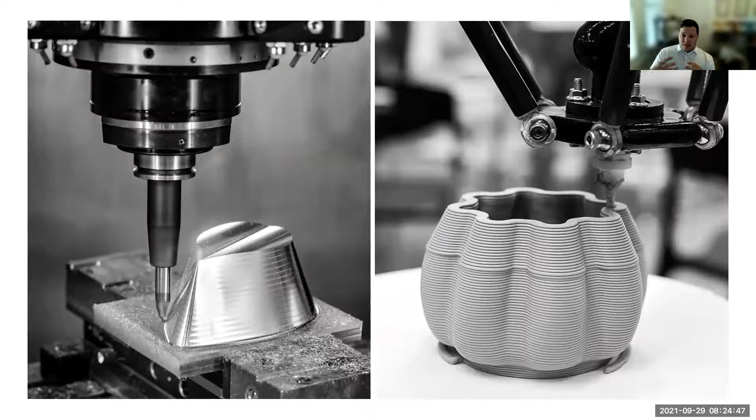As we begin to see fabrication technology advance, we're starting to see additive manufacturing with robotics, 3D printing, as well as subtractive fabrication processes. We're starting to see this need to make all sorts of different types of tools - that includes the physical making of the hardware, so either hacking, modifying, or building from scratch your own hardware to develop certain new workflows, as well as the digital side. How do we actually make our own tools to either automate our approach and make it faster or better, or develop new workflows that haven't really existed yet?

That's really where I've focused a lot of my time and my own research. One of the projects I wanted to start with today was a project I started what seems like a million years ago, but probably back in 2009-ish, maybe even earlier, with colleague Jason Kelly Johnson out in San Francisco.

We started a project called Firefly. One of the key concepts for us, or for me at least, was this melding or merging between hardware and software.

We can take the idea of things that sense the world around us, whether those are analog or digital sensors, game controllers, webcams, mobile devices - all these objects around us that have the ability to sense or perceive the world. We can call those inputs, and then we can define, usually through code of some sort, a behavior of what we want to use those inputs to define some sort of output, some sort of reaction. We want to control motors, valves, an LCD screen, or anything you can think of. That's your traditional feedback loop.

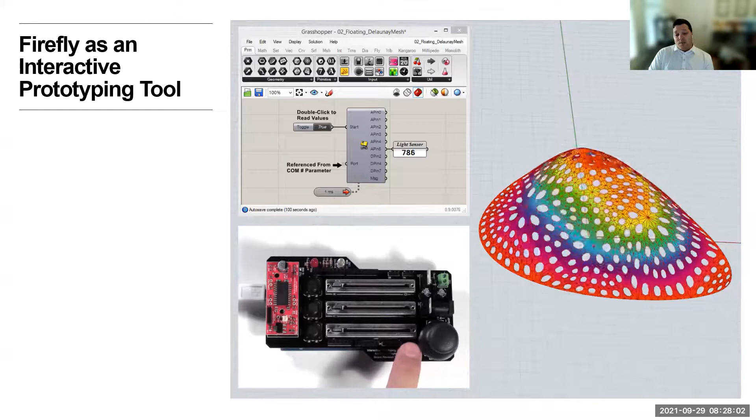That became a pretty powerful and interesting idea to work through. Really, what Firefly is, is this ability to take inputs - in this case you're seeing a light sensor, but it could be any number of inputs - and use those to, in real time, control a digital geometry.

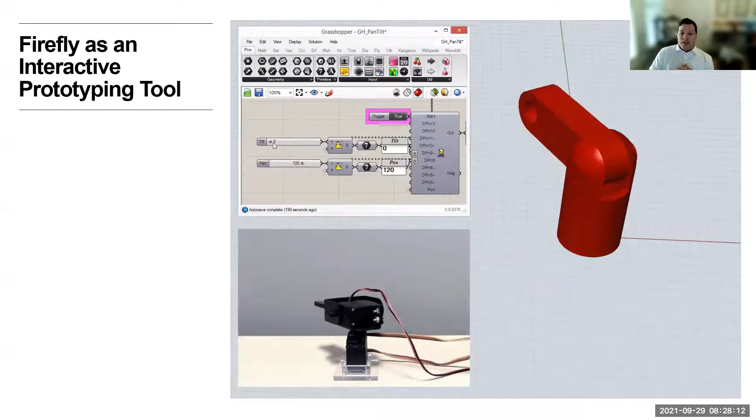There have been other tools in the past for processing and any number of tasks, but one of the things I think is beneficial about being coupled within a 3D environment like Rhino and Grasshopper is that you have the ability to drive 3D models really quickly, prototype them really quickly. You also have the ability to send that information back out and control physical devices like motors, a pan tilt servo, or we can do simulations.

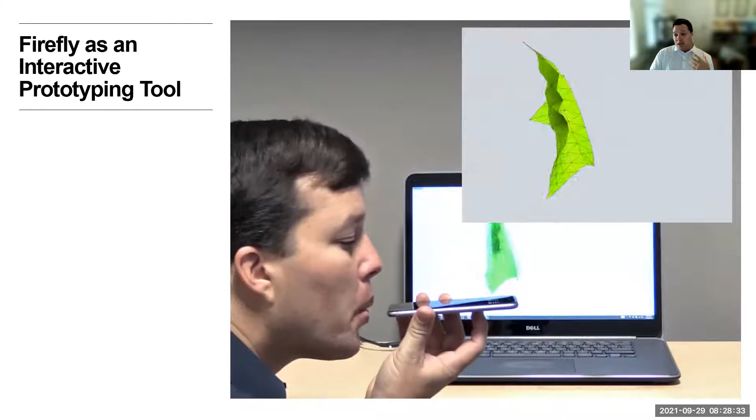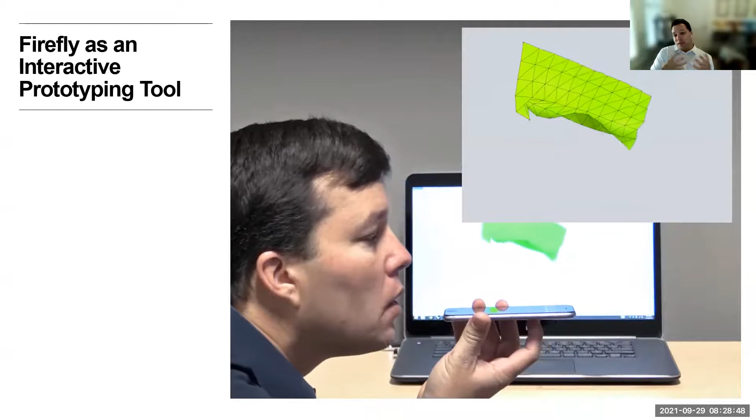We can take inputs like the microphone on your phone, and as I blow into it, it's basically sending a wireless signal to the computer and simulating a wind vector to move this flag of some sort.

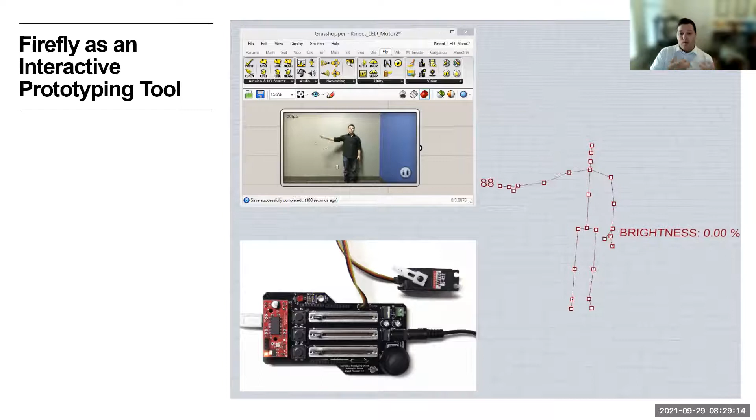Or using computer vision in a way where we can use our bodies to begin to control the world around us. Here are very simple, basic examples where we're using movement, in this case using the Kinect, the earliest version of the Kinect, to track our body, and then based on the positioning of our body, create a behavior, whether we want to control a motor or turn on a light.

One of the things I find really compelling, as I've mentioned about Firefly, is it sort of augments not only this feedback loop, but it also begins to introduce a different way of working for users, which I talked about a little bit. It takes this idea of the way most people are comfortable working with, say, sensors and motors.

In particular, there's been a real movement over the last decade using something called an Arduino, which is a programmable microcontroller. But really, a lot of times the way you program that is through code, through writing a text-based program, which gets compiled and then uploaded onto the board.

And that's the behavior that you're using. You're basically saying, go read some information from this sensor and use it for some sort of output. But you're doing that by writing code.

A lot of times, what I've found in various workshops and teaching opportunities is that for certain people, they don't really gravitate towards that mode of working, writing text-based software development. They have tended to work better in some instances with a visual representation, maybe a spatial representation, where I'm sure you're familiar with Rhino and Grasshopper, but particularly Grasshopper's visual programming environment seems to have opened up a lot of opportunities for people who gravitate towards a more visual programming environment.

But we also have this ability, I think, which became kind of interesting. One of the research parts I was looking at was how could we reverse that flow? How could we actually take something that was a visual graph and convert it back into code that could be uploaded back onto your board, onto the Arduino board?

So like I said, most of the time, the way we program these microcontrollers, for those who haven't seen it, it's not going to pick up because of the blur, but anyway, Arduino is a simple little microcontroller, but you typically have to compile it into machine language that it can understand. And typically, like I said, you need a compiler that takes some sort of text-based code. It can't really translate a Grasshopper graph for you.

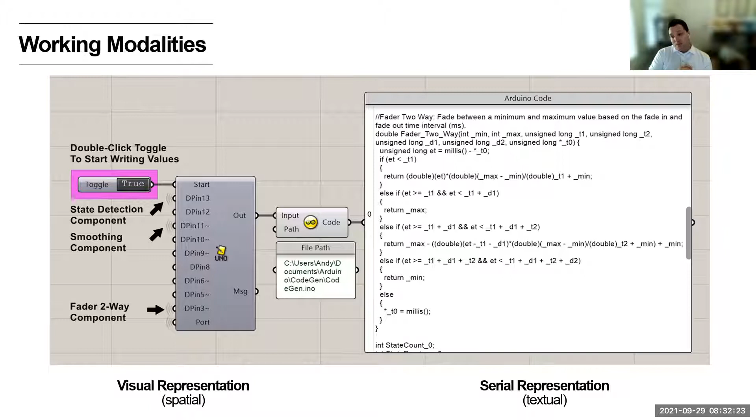So one of the things I worked on was a code generator, which in this case will look upstream on your Grasshopper graph and detect any type of component that it sees and try to write the appropriate Arduino code for you. So it really does become this prototyping method where you can use parameters, sliders, dial everything in for your prototype, get it working the way you want.

But typically the way you would have to then do is take that and write the appropriate Arduino code to get the device to work the way you want it. Now you can skip that step. Essentially the code will be written as you're prototyping, and then you can upload it to the board and let it run autonomously without having it connected to the computer or Grasshopper or anything else.

So it also, as a teaching tool, lets people look under the hood a little bit. For example, if you didn't really know, Grasshopper has a certain number of components, like a remap component or a constrain component. If you didn't really know what's going on under the hood, you just pass in some information and it spits out some information, but you don't really know what's happening. Now you can actually go in and look at the function for these components.

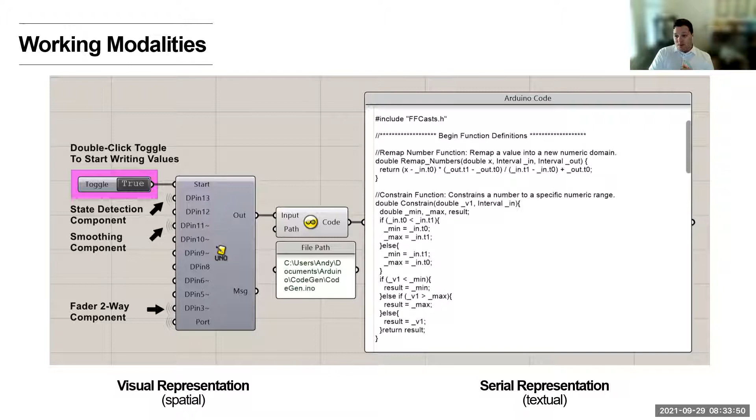So another thing is that this methodology sort of begins to open up new opportunities from a pedagogical standpoint, which I find kind of compelling. But you're probably asking yourself, after looking at those simple little examples, how do you use this? Why is this important for me? So I wanted to show a couple projects that I've done, where I used this type of workflow as a way to create hopefully something new.

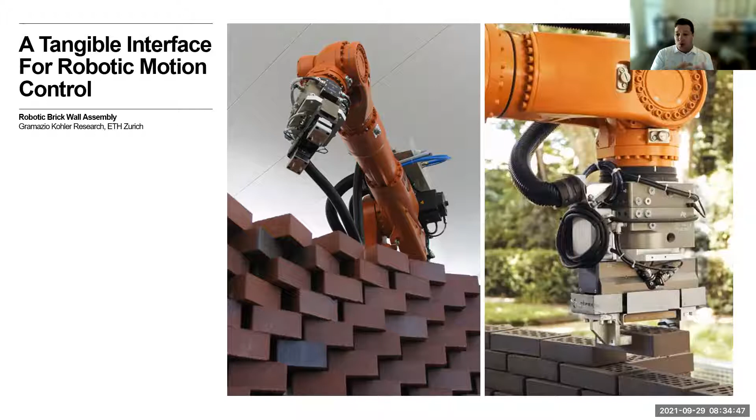But one of the limitations you see in a lot of instances is that it requires a large learning curve about not only knowing how the robot works, how to run the simulation, but how to write the program itself to upload to the robot to execute its path plan. So there's a lot of information that is typically unavailable for a standard designer. Oftentimes what happens is a designer will work on a project, a design, and have to hand that off to somebody with greater expertise in that domain in order to create these programs and simulations. And if at some point a collision detection or some sort of singularity is detected, it has to send back to the designer, who has to then change the design. It's a kind of slow and cumbersome process.

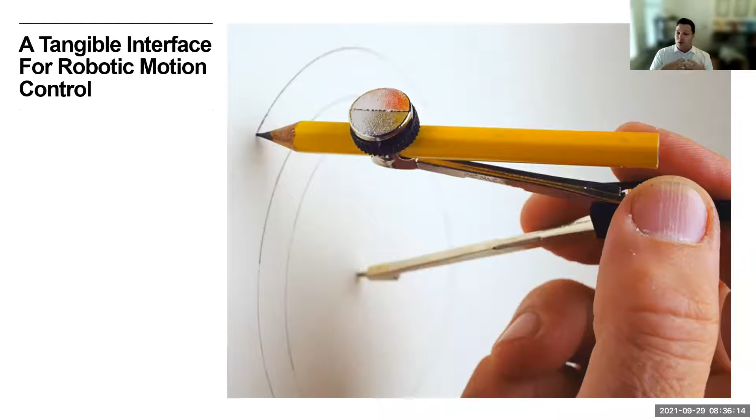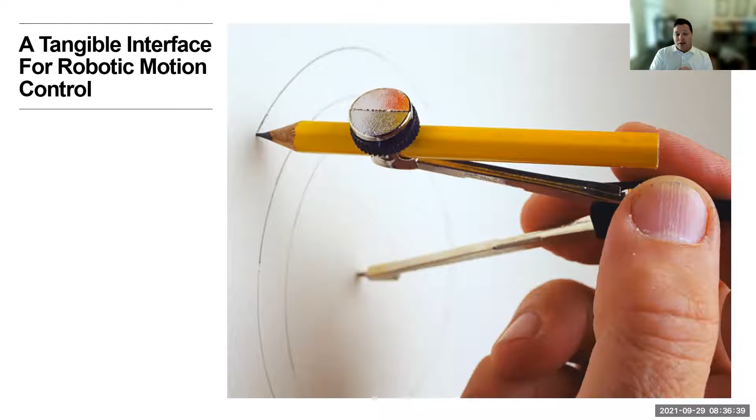So for me, I wanted to create a more intuitive workflow for a designer coming to robotic fabrication. Meaning, how could we create a tool, something that designers are already maybe used to? Something like a drawing tool. As designers, a lot of us are used to using tools, compasses, French curves, you name it, any number of tools to help us augment our design process. So how could we create a tool that could intuitively allow a designer the ability to control a robot during the fabrication process?

I started with, in this case, the ABB IRB 140 robot that we had at the GSD at the time. By extracting its core joint and axis configuration, I was then able to design a controller that mimicked those same configurations. In this case, it was at a half scale.

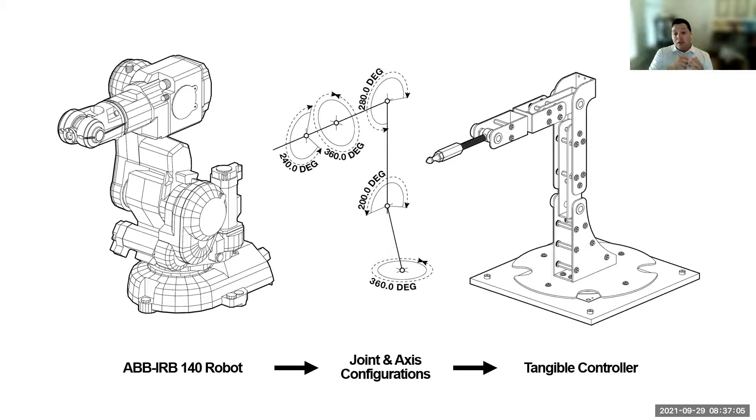At each point, I was able to essentially use a sensor, in this case a high precision potentiometer, which measures rotation. So if I use a sensor at each one of these axes, or at least pivot points, I can determine how much each of these joints have moved. And using a sort of forward kinematic simulation, I can work up the stack and find out where the end of that end effector would be. So just by having 5 sensors, I can perform a really simple calculation, a matrix transformation, and find out where the center point of that tool endpoint would be.

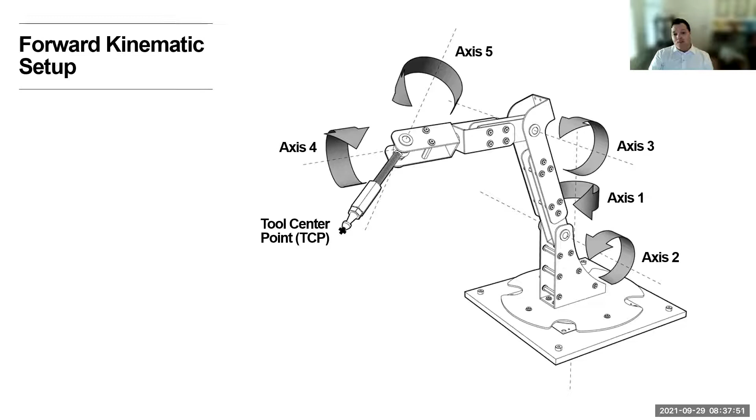So this was the actual device that I ended up building. Part of this project, this was a school project, not unlike what you guys are probably encountering. This was a project that I did while I was at the GSD and took a class at MIT called How to Make Almost Anything, which was a fantastic course. One of the requirements was that you had to fabricate and make everything in your project, including the circuit boards and writing the code and everything.

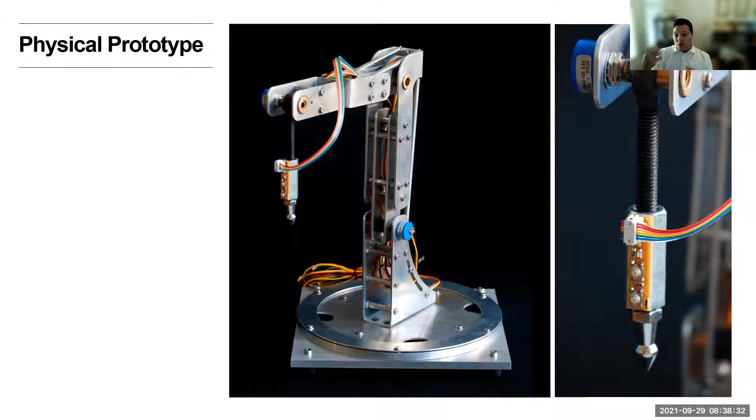So here you can see one of the circuit boards that was created on the tool tip to record or reset the tool path plan that you've created. And this was another circuit board created in order to, this is a modified Arduino board, that takes in all the inputs, figures out the rotation information, and sends it on to Grasshopper. So as a proof of concept, this was the first step in creating a real-time simulation. You can see as you're moving each of those joints, it's performing this transformation in real time and moving the three-dimensional geometry in the computer at the same time.

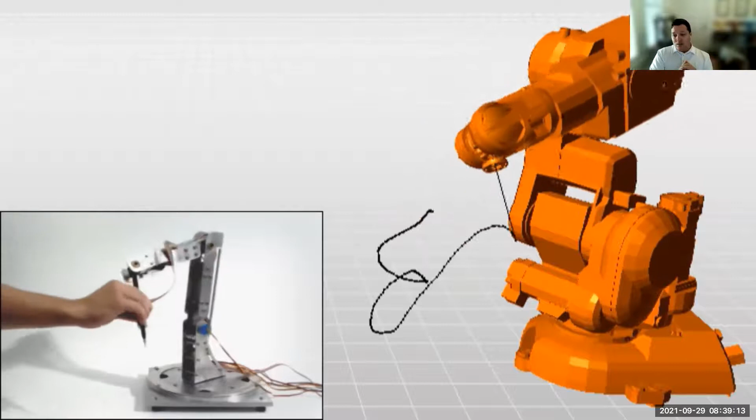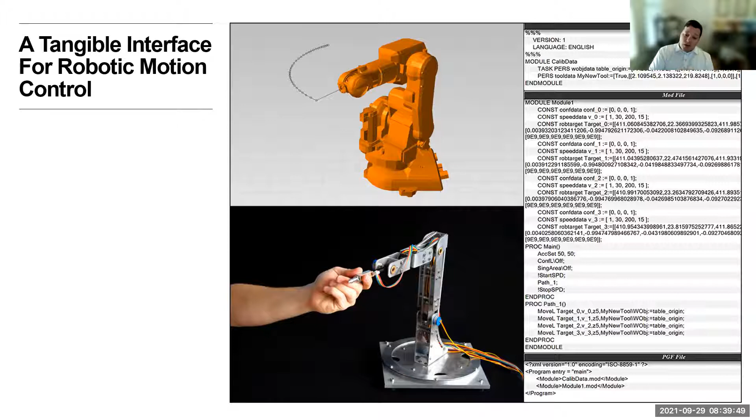Because we're moving this in a three-dimensional environment, we have the ability to track where the tool endpoint is at any given time. So as I push that button, I can simply begin recording the tool path. At the same time, I was able to translate that information into the machine language used to upload to a robot to execute the path I had just drawn. I also worked out a real-time streaming process that could send the movement information in real time to the robot. So here you're seeing the hybrid going from a physical tool to a digital simulation back out to the real world, to the real robot.

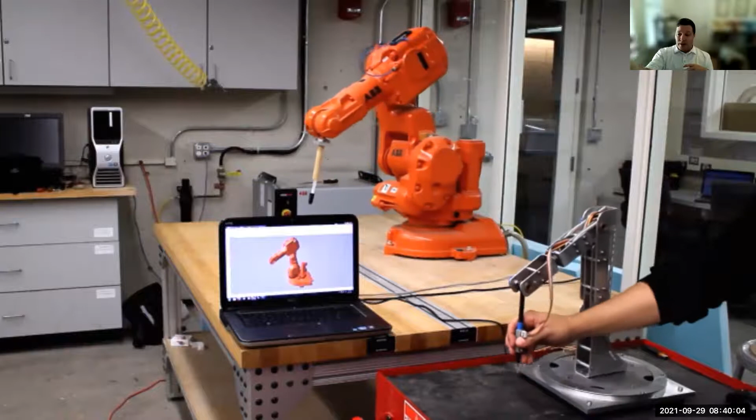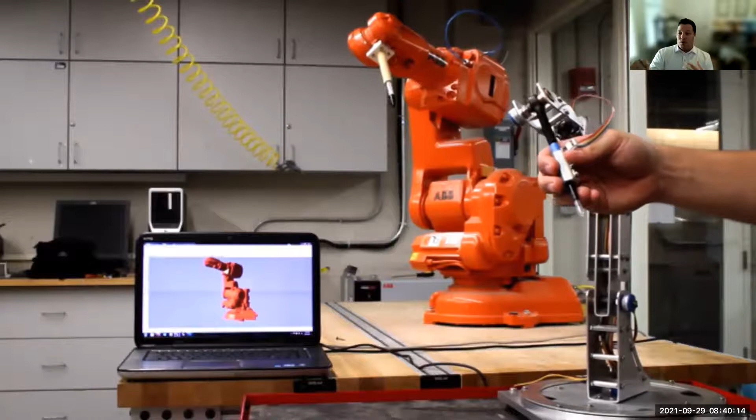This not only opens up new opportunities for a designer who can intuitively sculpt, draw, or modify things in the 3D environment, it also opens up opportunities for removing the user from the work area of the robot. Some of these robots are quite large and potentially have end effectors that could be circular saws or anything else that might be dangerous.

This also offers the opportunity to remove the user from the immediate working area and offer a factor of safety. So that's one project that begins to meld some of the concepts I was using in Firefly, this idea of making in the physical world and also making in the digital world, and combining those using sensors or actuators or any combination. For me, that's really where I find a lot of the work interesting, this ability to combine both of those worlds, because I do enjoy getting my hands dirty, making things, as I'm sure you guys do as well. But at the same time, we need to think about how we can use new tools like a robot and begin to augment them to create new opportunities.

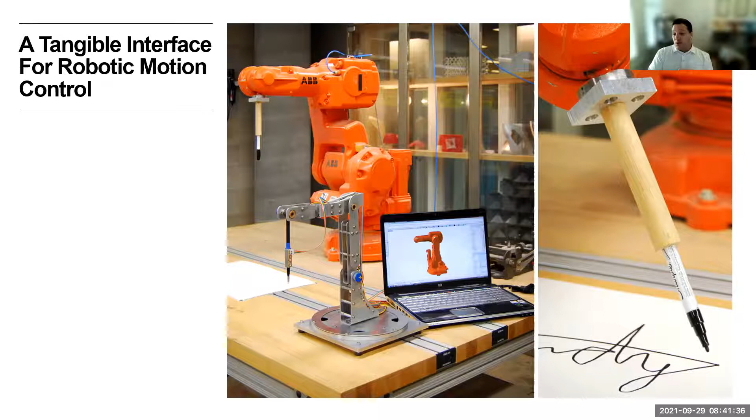I'm going to switch gears a little bit and talk about a second project, still in the same vein, but this was more about my doctoral research at Harvard. One of the things that became important for me was a simple question: what does it mean for architecture to be smart? I'm sure if I were to ask each one of you to respond to that question, you'd probably have a pretty accurate but also diverse set of answers.

Really, that's because there is no definition that meets all of the criteria. For each individual person, smart architecture, smart cities, smart environments - we hear a lot of that, but there's really no definition that has true consensus. We've seen the evolution of intelligent buildings starting in the 1980s, with systems that were separated and not really communicating to one another, all the way up to newer technology stacks today, which are fully automated, fully connected systems. That's really the evolution of what we call intelligent buildings.

But if we think about the control strategies, up until relatively recently, they've all been reliant on this idea of what I call a reactive or automated model of control. You can think of it like a thermostat: the sensor detects a rise in temperature, and it's programmed to kick on the air conditioning. It's a relatively simple reactive system. There's no way for the system to understand how the space is being used, or use any capacity for learning or reasoning.

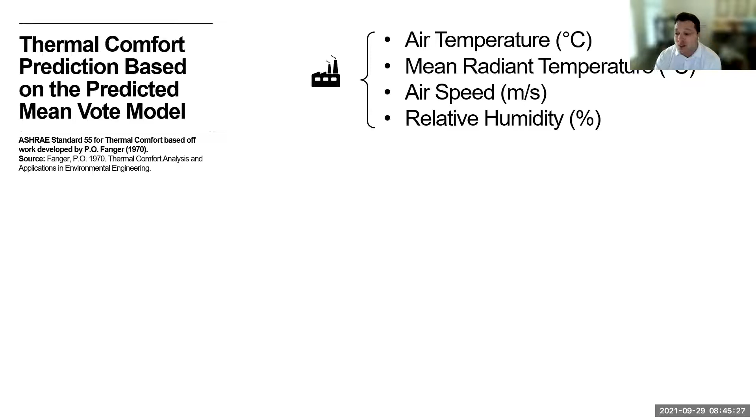There's air temperature, mean radiant temperature, air speed, and relative humidity. Those are the four environmental factors that come into play when trying to predict whether an occupant will be hot or cold. The two personal factors are how much clothing a person is wearing and the amount of work they're doing—are they digging a ditch or sitting in a chair? So what is the metabolic rate, or the amount of work they're actually doing?

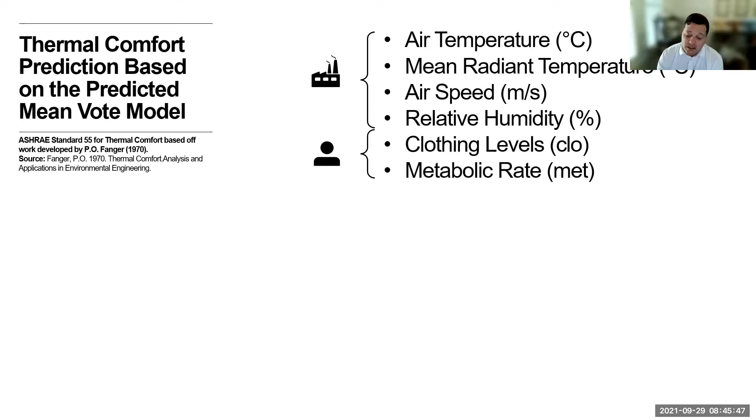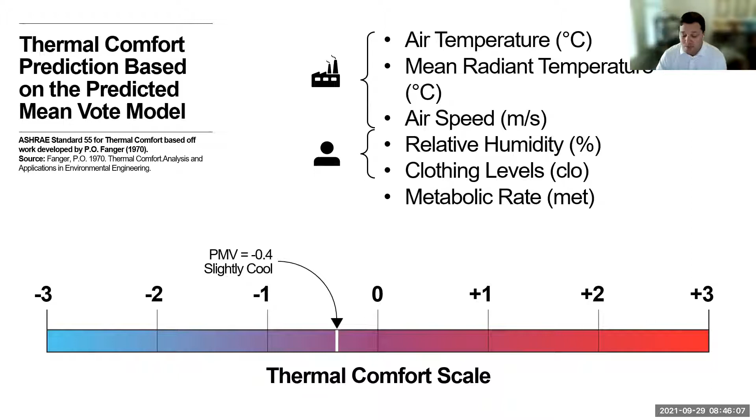Those six factors go into a large equation and essentially give you a value somewhere between -3 and +3, which predicts if the user is going to feel slightly cool or too hot, the ideal being somewhere around 0. Then, using another graph, we can predict the percentage of people who would be dissatisfied using that predicted mean vote.

the ASHRAE standard is set up to allow for basically—the standard says it's okay as long as we fall within an 80% satisfaction rate, which to me means we can do better. As architects, as engineers, we should be striving to do better than having 20% of people in our spaces being dissatisfied every day they come to work. If you think about the labor force, you're talking about millions of people who show up to work every day who are generally going to be dissatisfied with the environment around them, and to me, that's a problem.

So I developed a tool. A lot of the research I focused on was developing a neural network tool built on this idea of the predicted mean vote.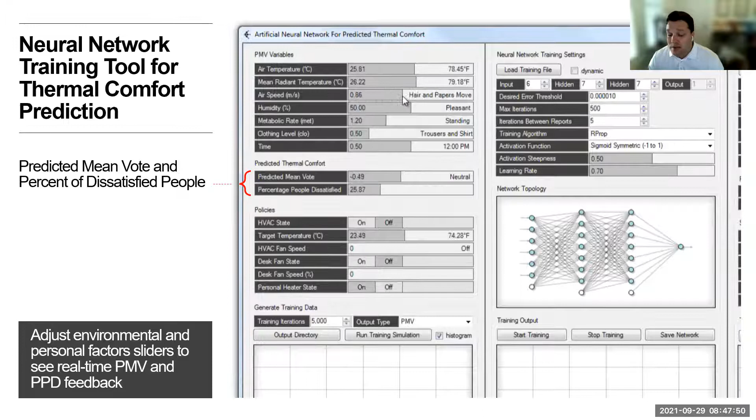As I mentioned before, there's an algorithm where you plug in those six different factors, and it will determine the predicted mean vote. So here, the left-hand side of this interface is really about using that algorithm that P.O. Fanger developed. You can see you're moving these sliders, and you can see the predicted mean vote and the percentage of people being dissatisfied.

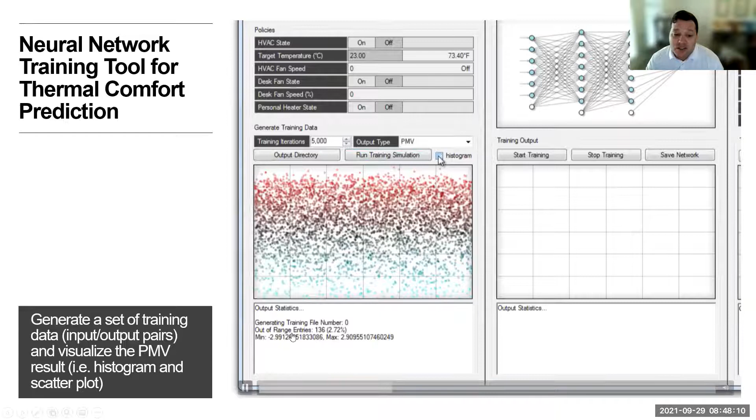Here you can generate basically random data, randomly assigning all six different values and creating 5,000 different iterations. This generates some training data to feed into the next stage, the neural network training.

So here, what we're doing is taking those 5,000 sample points, and we're going to try to create a neural network which can get as close as possible to that predicted mean vote output.

The way a neural network works—again, this is a condensed version—is you have some inputs, and it tries to predict an output. In this case, the input is those six values, and the output is going to be the predicted mean vote, this number between -3 and +3.

So you're feeding in those values, and as it learns, it's essentially adjusting the weights of the neural network so that at first the output is really far off. But ideally, as it learns, that predicted mean vote gets closer and closer to the true value.

So here you can see I'm coming up with some different settings, and I can start the training—there you can see the error rate. Essentially, at first what it predicted and what it should have gotten were pretty far off. But eventually, as it begins to learn, that prediction becomes much closer to reality.

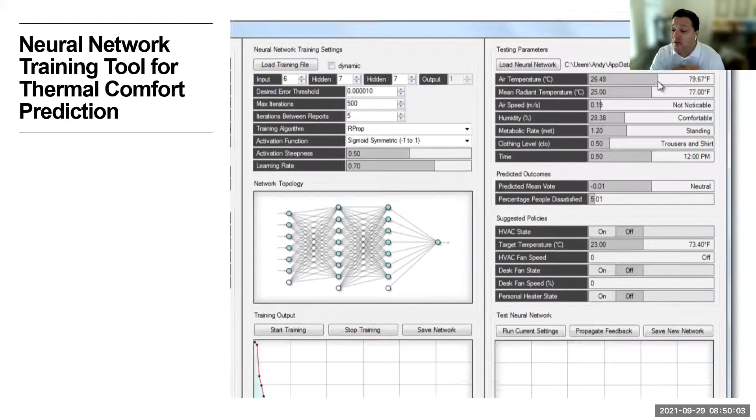So the next step is to give it new values. Now I can load in the neural network and give it different values to see what the predicted mean vote would be, but now it's using the neural network output instead of the algorithm.

So here I can take those same 5,000 samples and run them. The red in this case represents the initial values, and the blue are the outputs from the training set, from the neural network. Really, what you should see is a graph that overlays on top of each other fairly closely.

You're probably asking, why are you doing all this work? You already could predict it using the algorithm, so why are you doing all this work? Well, the key here is that neural networks have the ability to adapt over time.

So if in this case, the value thought it was at 0, but I change it to say the user actually was quite cool, they thought the setting was cool based on these different factors, I can retrain the network based on this new value.

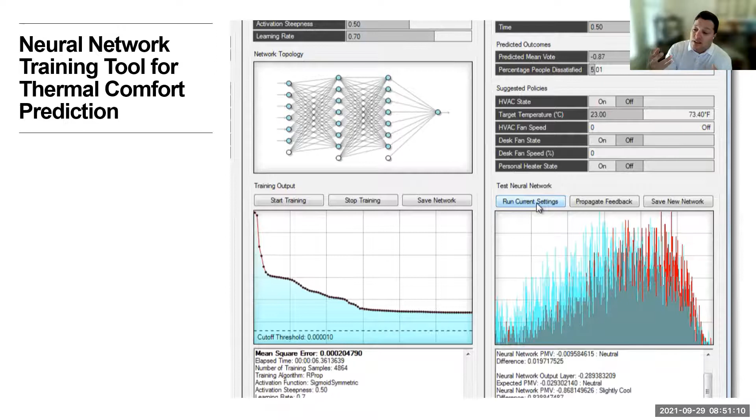And now when I run the setting, you'll see there's a shift in the neural network. So what it's done is it's learned how to augment the settings based on the feedback given from the user. So if we look at this, we have the true value starting off, which is based on the average user, if you will, based on all these different settings.

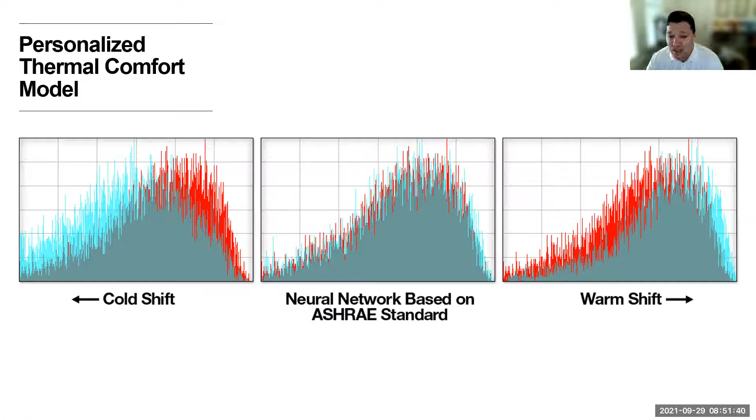But as we begin to give it feedback from the user, the neural network can begin to learn and adapt the space accordingly by either shifting to the warm side or shifting to the cool side based on the feedback it's getting. And so it has the ability to adapt to each individual user and how it's being used.

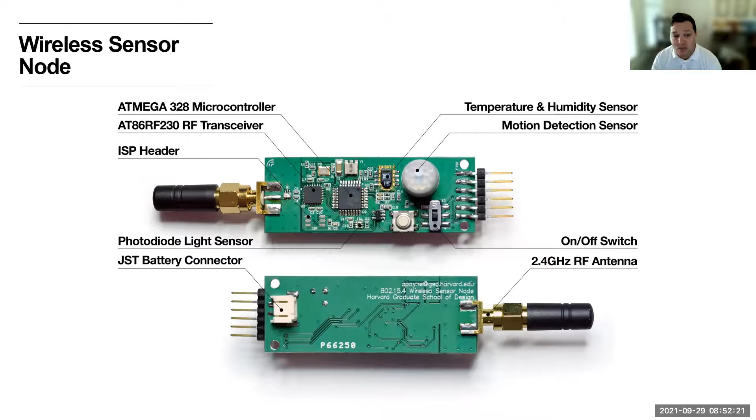One of the things I had to do was be able to determine the environmental settings inside a space. So this was a wireless sensor that I developed that detects temperature and humidity, motion detection, as well as light levels. And this was sort of the enclosure that got built into.

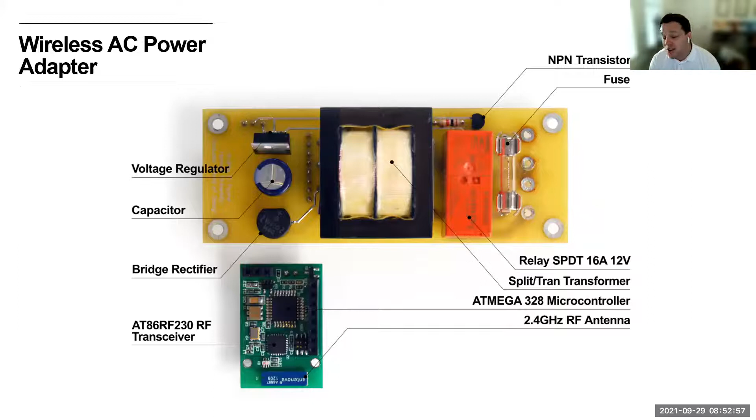There was another thing that I wanted to develop, which was an AC power adapter. Now we're used to seeing Alexa, you can buy these things from Amazon which will wirelessly turn on and off anything you connect to it. My 5-year-old has an Alexa smart plug that was probably $20 that you plug in and say turn on the smart plug, and it'll turn on his lamp next to his bed. But 5 to 7 years ago, when this research was being done, that didn't exist.

And so this was a wireless power adapter that could wirelessly turn on whatever you plugged into it. And that would help because I could plug in a heater or a lamp and then be able to communicate with that particular device. Because what you see in a lot of office spaces, right, and I have some of this research in the dissertation...

There's been some really interesting case studies of a LEED platinum building, which has been engineered to be fully sustainable and have the best environmental settings you can. And if you walk through, what you find are personal heaters below the desk, or a desk fan, a task light, earphones over the desk.

And all of that is because people are not the average user. Everybody has different preferences, and they need to augment their space. And the only way they can do that is to bring in these personal devices.

But what then happens is there's no way for a heater to communicate back with the central building system, right? So a user might be cold, so they turn on the heater under their desk, and then the thermostat detects a rise in temperature, so it kicks on the AC, right? So now you get this negative feedback loop, which is causing a waste in energy expenditure, but also making the occupant even more dissatisfied.

Probably the most involved of the hardware was this idea of a personal desk fan. One of the things that got me excited about this is that studies have shown you can save anywhere between 17 and 48% on your cooling energy by using a low-powered fan to offset the impact of increasing the ambient temperature in the room a couple degrees.

So instead of keeping everything at 72, if we turn the thermostat up to 76 but then use a really low-power fan on each person's desk, we can save a substantial amount of energy. If we work out the math using an average kilowatt per square foot, it works out to potentially $1.5 billion we could be saving by using simple devices like a fan in a room. So it has potential for a fairly large financial impact.

But one of the things I wanted to do was take the idea of a regular desk fan and make it a little bit smarter than a typical desk fan, because not all desk fans are low powered. This particular desk fan has two 3-watt fans on the sides, but it also has a webcam built into the bottom, and it has the ability to use facial recognition to track where the user is and only direct the cooled air toward parts of the body that most affect comfort.

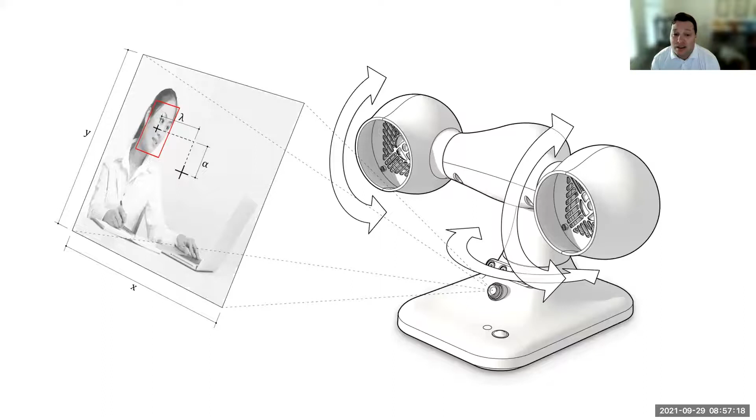There are studies that show for cooling, you want to focus the air mostly on your face and neck regions. For heating, it's more the feet. What they found is people tend to show the best results in a sort of asymmetric thermal environment. It's not like everything around you has to be the exact same temperature. In fact, our bodies tend to like certain things cooler than other parts.

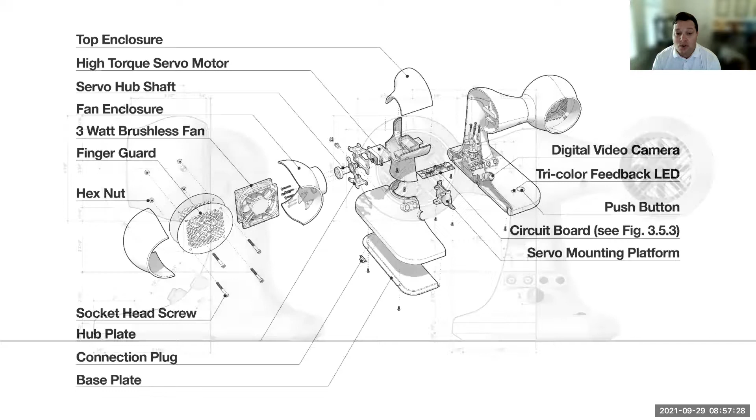So I designed a fan that could be low power, but also try to really focus the cooling where it's most needed. Here you can see an exploded axon view of all the different parts in the fan itself. Here are all those parts laid out before final assembly, and this is the final unit. I actually built 4 of them. I can turn off the blur on the fan, but they're sitting on the shelf behind me.

I'm going to try to play a video. I don't know if the audio will work, I may need to actually, yeah. I'm going to try to play a video, and hopefully the audio will work on your side. Marshall, will you let me know if the audio is not working? It's not going to be the end of the world if it doesn't, but hopefully it will work for you guys.

Meet the new smart fan. This little guy is designed to be the... I can hear it. It's a little low, but I can hear it. Hang on, let me turn up the volume. It looks like it's already up.

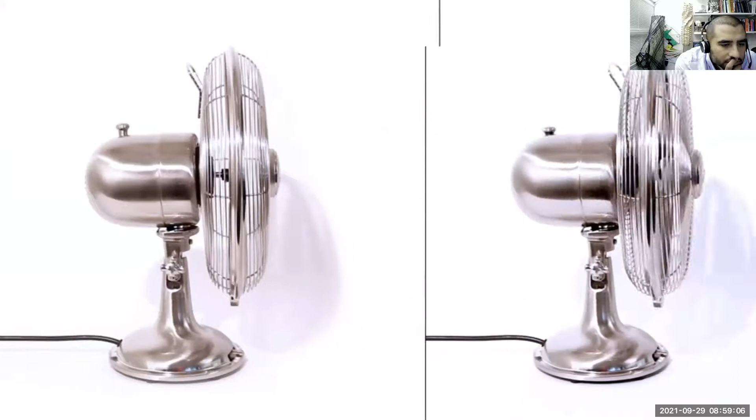Meet the new smart fan. This little guy is designed to be the smartest smart fan ever invented. He has the ability to learn when and where to focus his attention, using facial recognition to direct cool air towards parts of the body that most affect comfort, like your face and neck. He's also smart when it comes to energy. Studies show that we can save a substantial amount of energy if we raise the ambient temperature in a room just a few degrees and use a low-power fan to cool off the body. Yet most fans only have the ability to perform 1 of 2 actions. They can either sit still or oscillate back and forth. Because most people don't sit still or rock back and forth all day, regular fans waste an inordinate amount of time and energy cooling the area around the actual person. Needless to say, that just blows. The smart fan uses 2 small 3-watt fans, drawing about 1/3 of the power of a typical desk fan. Plus, with his built-in video camera and facial recognition software, he spends all of his time and energy making sure you feel good. The smart fan also has the ability to communicate with everyday devices like task lights, personal heaters, and larger building control systems. And as if that weren't enough, he also uses state-of-the-art machine learning algorithms to get better and better at maximizing your comfort. Smart, right? Welcome to the future of personalized comfort control. Your personal desk fan just got a whole lot smarter.

So that was a video that I put together also as part of this research. All of this to say is that this was all 3D printed parts, stuff that you can get off the shelf. This is nothing that I really did that is out of the scope or possibility of stuff that you guys could build.

Obviously, it took some time to build all of those different parts and develop it, but part of what I'm hoping to show or inspire today is this idea that you can really make any and all of these things. It doesn't have to be mass produced. Those were 3D printed enclosures that were sanded and painted. Really, it's hopefully giving some confidence to be able to say a lot of this stuff is achievable, even just on your own, using just your own fabrication tools.

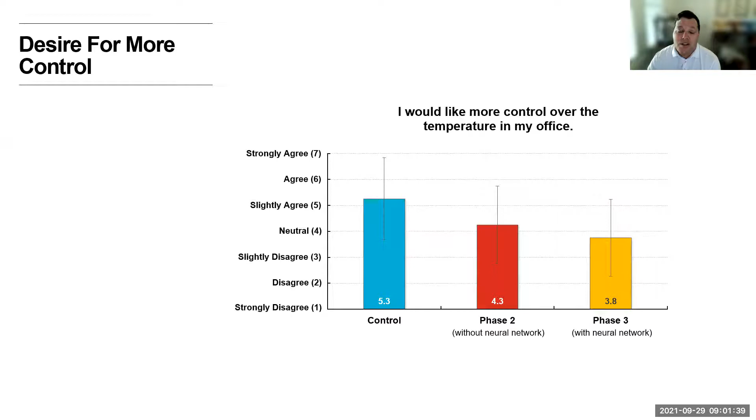Their desire for more control decreased, and that was correlated with the actual user interactions with these devices. So you would expect if somebody's desire for more control went down, it would also indicate that they were turning the devices on and off less. And here you can see the devices were turned on and off less because they didn't really need to—it was sort of adapting for them.

As well as, and this is a notoriously hard thing to measure, the productivity or perceived productivity gains from the environment increased as you began to use the system. So there were a number of interesting results that came about through this type of research.

All right, I've got one other project, which is kind of a departure from what I've shown thus far, but it talks about a project that I did with another colleague, a professor at the GSD at the time, Panagiotis Michalatos, who Marshall knows well. We started on this project at the same time I was doing this research about 3D printing, and essentially I had this opportunity of working with Objet, who then was bought by Stratasys.

If you are unfamiliar with their 3D printers, they're pretty amazing because they have this ability to do multi-material 3D printing. I believe they now have models that can do up to 4 different types of resin. Essentially, we have the ability to control the deposition of different types of materials—not only color, but also opacity as well as structural properties. They have soft rubbers and harder materials, so we had this ability to do some experiments with this multi-material 3D printer.

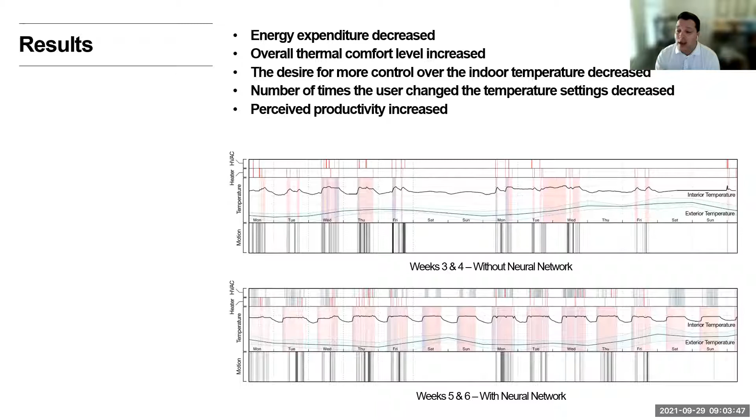One of the things we started to realize is that the hardware had really progressed more than the software side. What I mean by that is we now had hardware with the ability to deposit material at any different spot within a 3-dimensional volume.

But the way we designed objects was still largely using this idea of what's called a boundary representation. You guys may be familiar with something called a BREP, right? That's short for boundary representation, where you define the boundary volume of an object, but everything inside is treated as a homogeneous type of material. If we were to take a section cut through this, it would be a solid homogeneous material. Really, the way we think about 99% of the tools out there is using this idea of a boundary representation.

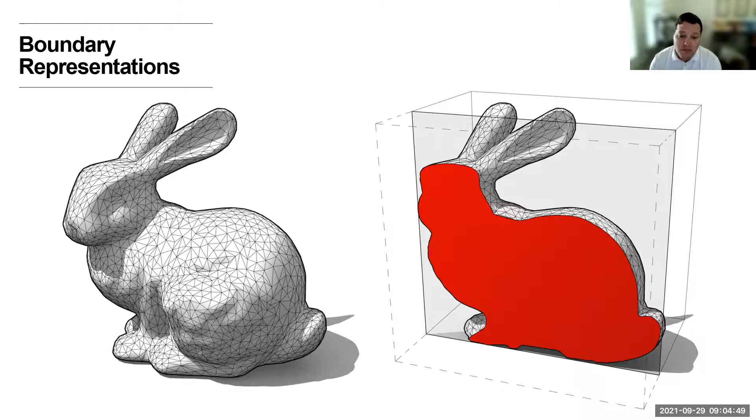We started to think there's got to be a better way, especially for controlling volumetric material deposition. We looked a little bit towards this idea of the assembly paradigm—instead of one homogeneous part, how do we start to take this idea of individual parts and link them together, as well as looking at other models out there that are not typically used for design.

So there are representations out there that begin to speak towards this idea of how we understand how material is placed within a 3D volume. It's just not, or hasn't been until recently, available in a design package.

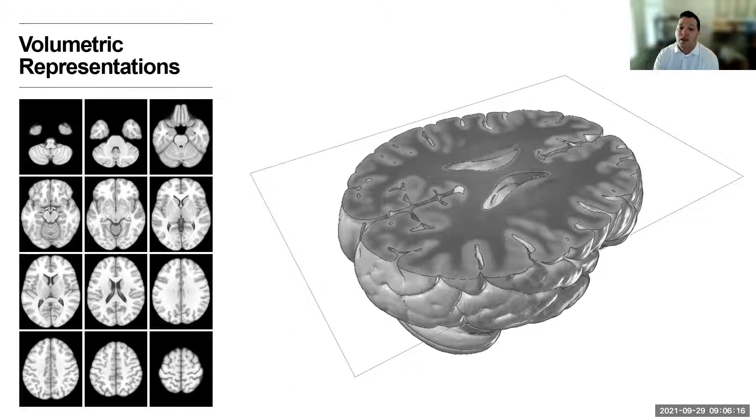So here you can see a slice through. This is very different than that bunny model because now we can see the density of the tissue layers is quite different throughout the volume.

So what is a voxel? A voxel is really just a 3-dimensional pixel, a structure that is able to store information within a 3D volume. If we think about a pixel in a 2-dimensional image, a pixel is just an atomic element, in this case a square, that can store information about that particular space in the image. So we have different channels like red, green, and blue that control the color of that spot on the image. Well, a 3D voxel is very similar.

It's just that instead of 2 dimensions, it's working in 3 dimensions. So instead of being a square, we can think of it sort of like a cube, but really it's just a data structure that stores information about that particular spot within a volume.

So what we decided to do was think about how can we create different types of channels or ways to store information within the volume, in order to distribute material for this multi-material 3D printer. What we came up with is this idea of two different channels, one that controls the shape of the object and another that controls the material ratio.

What you're seeing is the top one defines the global shape that you're going to print, and the bottom one is controlling, in this case, just a linear gradient between two materials. It goes from black to white, where black will be one material, in this case the blue when 3D printed, and the white will be another material, the red. Any combination between the two, we can create infinite gradients.

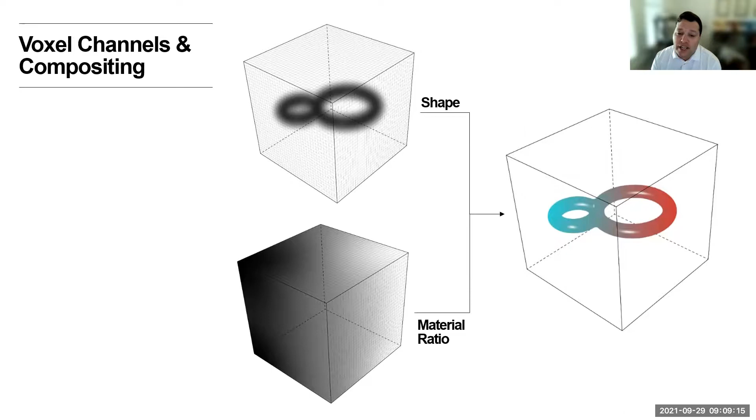So here, going back, we can composite those two different channels together to create one final output. I'm going to show a couple of different working techniques we developed. This is a tool we developed called Monolith, which was eventually acquired by Autodesk.

This is a design platform we developed to allow a user to control voxel-based modeling. Up until this point, I'd say 99.9% of design software out there had been mostly built on this boundary representation model. So this was a new way of thinking about design, and these are some of the different techniques we created.

One, in this case, is this idea of painting. You can paint a shape in the three-dimensional volume, and depending on the layer you're on, whether the shape layer or the material ratio channel, you're defining those different attributes. Here I'm drawing in a 3D shape, defining the shape channel, and you can see it's creating those volumes.

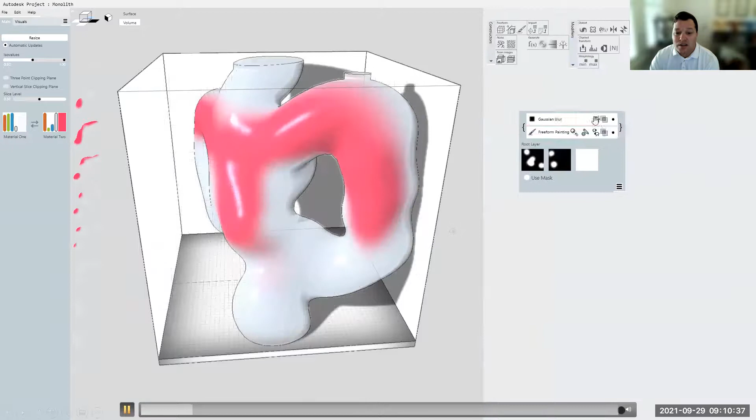Now I'm in the material ratio channel, and I'm painting where I want different materials to be. Another interesting thing, as I change the slider, is that because we're extending the idea of a pixel to a three-dimensional voxel, we can apply lots of similar image editing techniques, like blurring.

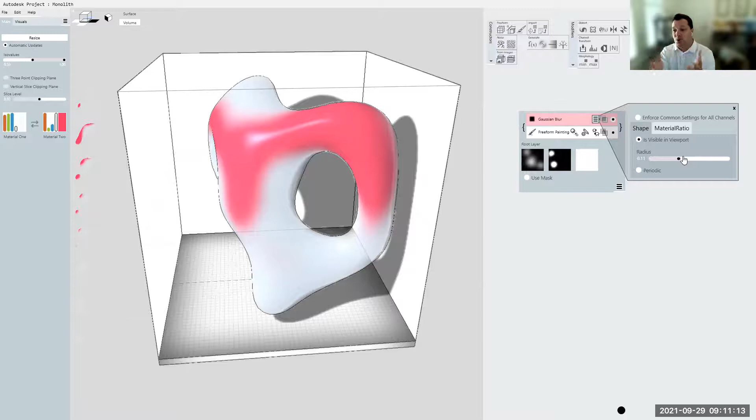All of you are probably familiar with using Photoshop or some image editing software which blurs the image. We can take those same ideas and apply them to a three-dimensional model. Here we're using a Gaussian blur filter to smooth over the model and blur those voxel values, changing the Gaussian blur to make it more smooth.

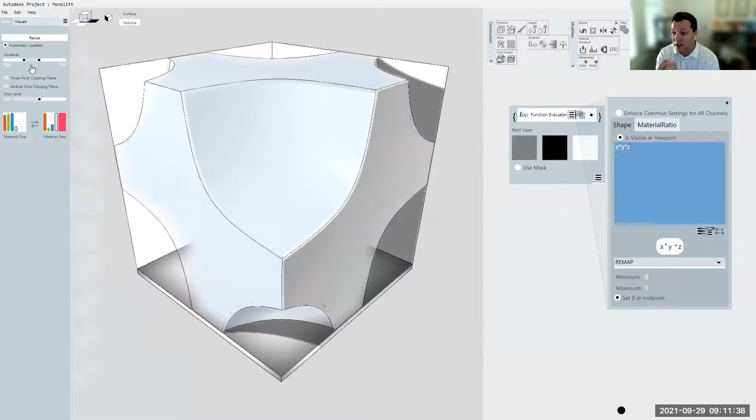Another thing we can do is apply mathematical formulas. Take each voxel's x value and multiply it by the y value and the z value, taking those coordinate values and multiplying them together to get a three-dimensional shape. We can take any number of mathematical equations, or use a preset like the gyroid or Schwarz surface, and apply those to either the shape channel or the material ratio channel.

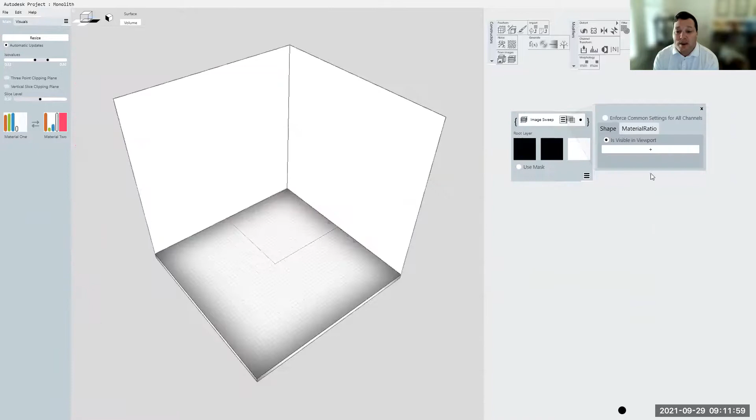So here we're creating mathematical surfaces, or we can take images. In this case I'm taking two images together, a radial blur and this cross, and doing a loft or a sweep. If you're familiar with Rhino commands that do a sweep or a loft together, we're taking those two images and blending from one shape to the other shape.

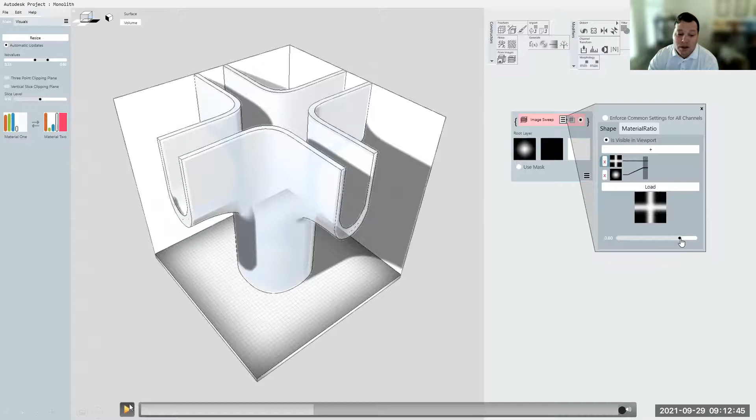One of the things that voxel modeling is really good at is this blending between different shapes. Here you're seeing this fillet as it comes down between this cross and intersects with this tube, we get this really nice fillet. That would be really difficult to do using a boundary representation model. Now it's easy using a voxel-based model—that's one of the benefits of using that type of technique, getting very smooth transitions between objects.

Here we're doing the same idea, but instead of just doing it top to bottom, we're doing it in three different directions. Depending on the image we use, we can create different types of sweeps or lofts throughout the volumetric field to create different types of geometry. Another thing to think about is taking that boundary representation I mentioned before, but now really controlling the material deposition inside the volume.

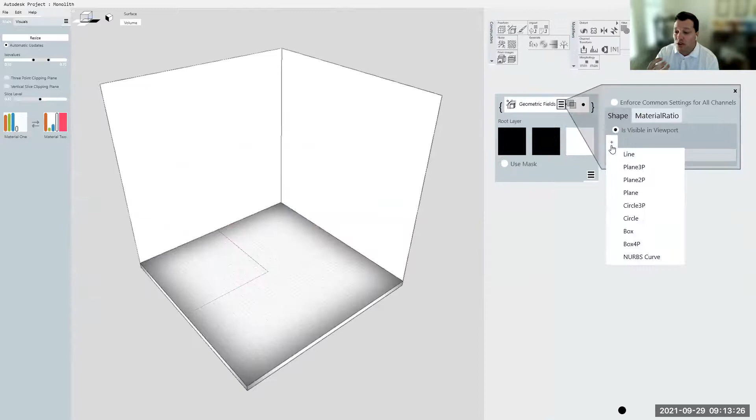Another interesting thing—and I wish we were in the same room so I could get a show of hands, but most of you have your cameras off—I'm sure most of you, in the course of doing some modeling exercise, have had to perform a Boolean operation, whether adding two objects together, removing one object, or taking the intersection. We can do that with images, and a lot of times with boundary representations, if you get complex forms, those Boolean operations might fail.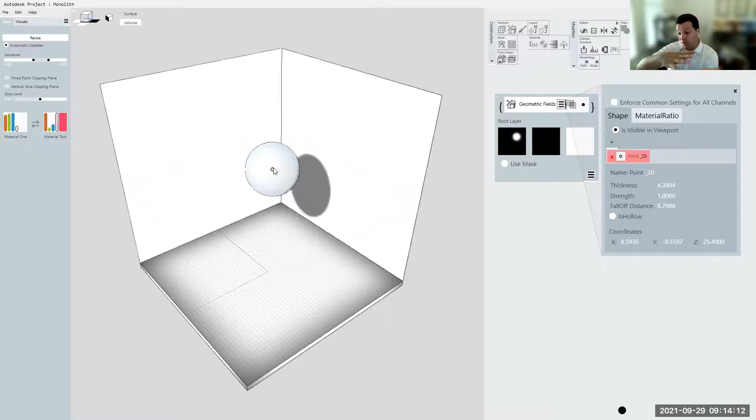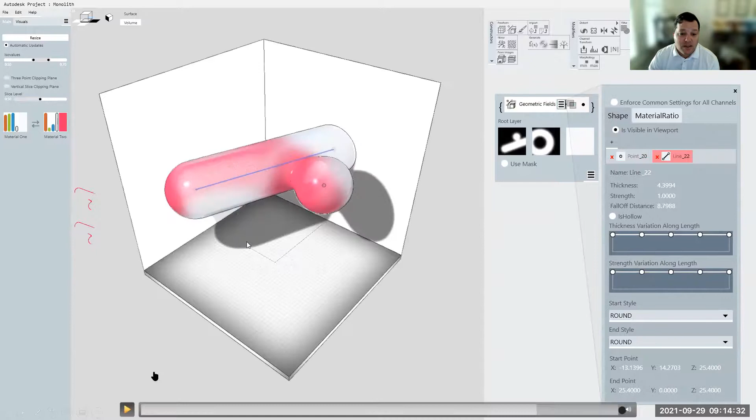Because it's really having a hard time figuring out how to remove one object from another. Well, with image editing, all we're doing is stacking those together and either subtracting or adding the pixel value above it onto the one below it. So it's very easy to create objects that blend or perform Boolean operations. In this case we're doing signed distance fields, and as I add another shape layer I can create a line that intersects with a point, and here you can see they smoothly blend or Boolean together because I'm adding them.

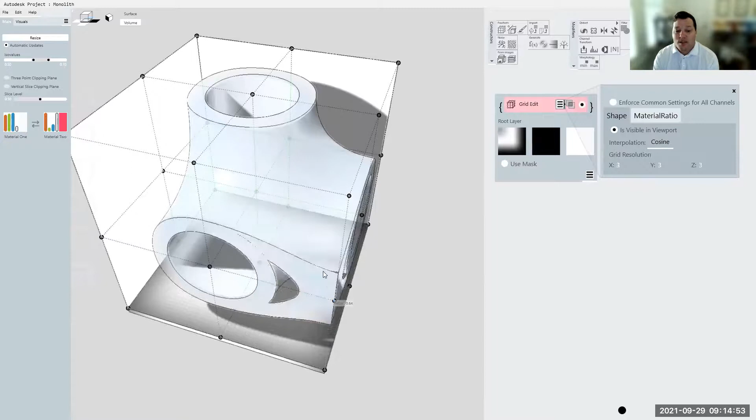We also have the ability to create cage-like objects where we can sculpt within a cage, changing the different interpolation factors. Essentially, we can change the values of different points in a space and create objects that would be quite difficult to do by hand modeling. But now, doing it within this voxel field, we can create very smooth transitions and relatively complex forms.

The other interesting thing we began to explore is this idea of mesoscopic or microscopic deposition of patterns. Not only could we create forms at the global scale, which I just showed, but we also have the ability to take smaller patterns and propagate them through a volume. For example, here we have a linear gradient going from white to red, but we can give it a pattern, in this case like a 3D cross, and it will smoothly tile in between to achieve that gradient we were just trying to create.

So if we want it to go less red and more white, you can see that the tile object here is this 3D cross, but as it needs to become more opaque, it seamlessly transitions into this object that's more dense, if you will.

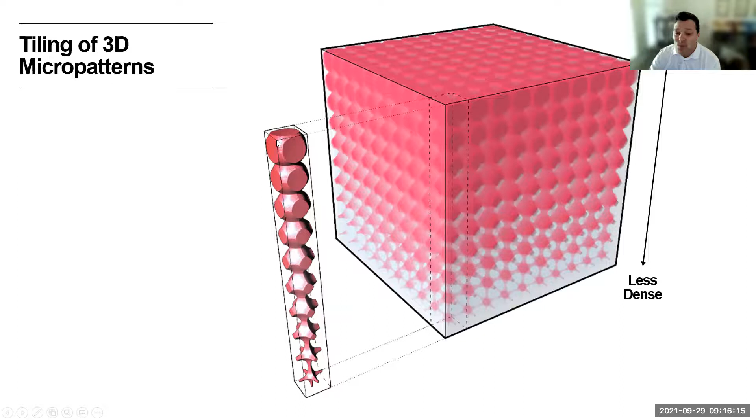So we have the ability to create really interesting patterns throughout the geometry by taking sort of a 3D cell and propagating that the way you would a UV map, but now we're applying it in UVW. By controlling the UVW patterns, we can create not only optical patterns but also structural ones. So white and red here could represent different types of hardness or density, where you have more rubbery materials, and you could achieve lots of different types of effects.

So here are just a number of different examples. We also have the ability, and this is another example of how we can create those different cellular patterns.

So one idea is to create, just like I showed, images and create a 3-dimensional volume. We took the radial blur and the cross and created a sort of sweep between them, or the other one which was creating it in the X, Y, and Z.

We can take that same idea and use it as a cell that we propagate through, so we're taking that global form and using it at the micro scale, or the mesoscopic scale.

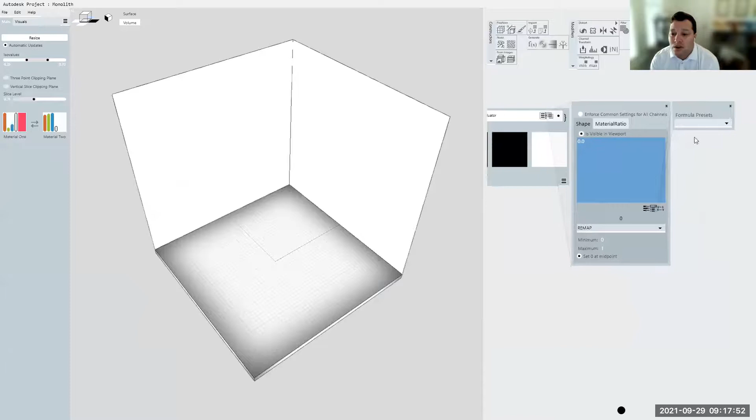So here, what we're doing is creating a texture in Photoshop, and then we're going to use that texture as a way to create this three-dimensional volume. So here I'm creating just a shape — in this case it's the gyroid shape — and creating a linear gradient through here.

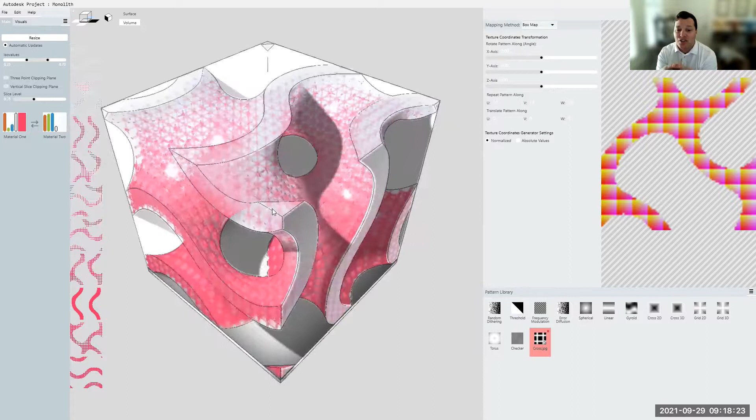Then what I'm going to do is apply that texture that I just created. So there's the cross, and I create a texture, and I can determine if I want to extrude that in Z or XY, or multiply it. It really gives me the ability to create these mesoscopic patterns throughout the volume, so I can create a cage-like structure, in this case getting denser at the bottom and more transparent towards the top. Now the other thing I can do is say 'use current model.'

So in this case we had a gyroid as our three-dimensional shape. I can take that gyroid and use it as a pattern, then apply that as a mesoscopic scale pattern throughout the shape. So you're taking the global form and using it as a patterning technique throughout the object. Here it's using the gyroid as the pattern that it will propagate through.

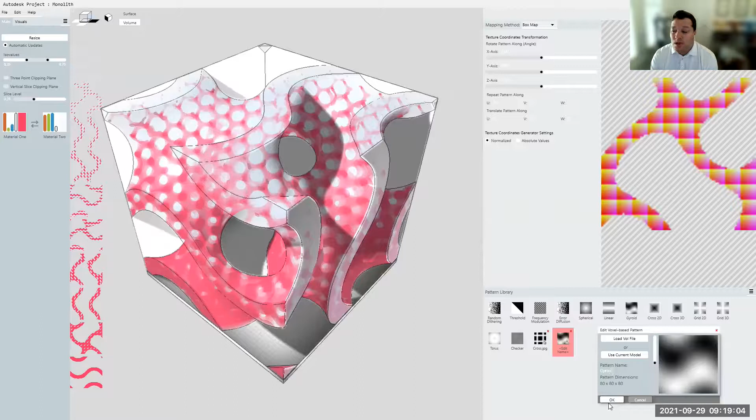The nice thing about a gyroid is that it's triply periodic, so it has the ability to connect on all three sides. And here you're looking at our slicer, so you can imagine cutting this thing in slices to see the differences between what is one material and what is the other.

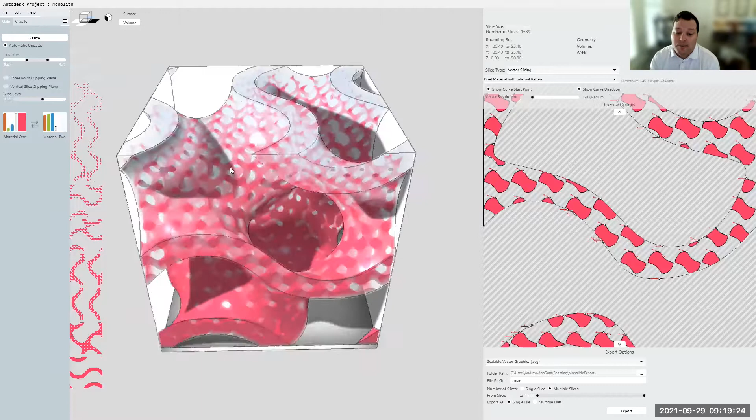So one of the things we found really compelling about using multi-material 3D printing and this voxel representation is because we're in this three-dimensional voxel field, we have the ability to make slices which create those 2D images. And what's interesting about object printers, as opposed to something like a standard 3D printer...

A standard 3D printer is using G-code most of the time to move the motors in different ways to show where the head needs to go. In this case, it's using an image — actually two images — where a black pixel means don't deposit any material, white means deposit material for this particular head. So the red nozzle would get this image, and the white would get this image. Basically, we can take a slice through the voxel field, extract it, and determine the two bitmaps to be sent to the 3D printer, which can then control the print head.

So we can really get down to the very microscopic — each individual drop of resin in the print head can be controlled through this technique, and that's called bitmap printing. Here you can see you can create patterns that have the ability to create anisotropic material deposition. So if you wanted it to bend one way but not another — here you can see it's almost like creating an artificial wood grain. You have wood grain going this way, so it's stiff when I try to push it together.

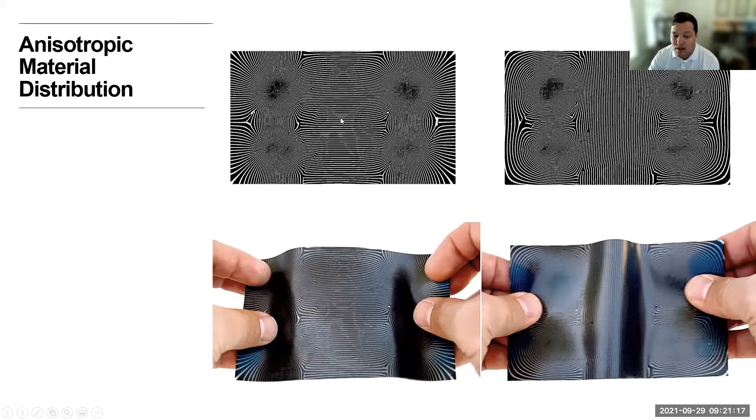We also have the ability to create optical occlusion based on different viewing angles. Because we're altering it throughout the volume, if you looked at it head on, it would look like a gradient. If you tilt it, it's almost like a micro louver system and begins to occlude objects behind it.

Another thing that would be completely impossible to do without bitmap printing is this idea of hairline features. Imagine creating curves throughout a volume, and you have to create meshes for each of those objects as STLs and then try to 3D print those. It would be incredibly difficult with the resolution to get to that fine scale.

But because we're doing bitmap printing and because we can control the deposition of the model, here you're seeing stress lines as if he's pushing down on the object. This would be the stress lines that would be induced into this object, but you can actually see through it because we're doing multi-material printing with clear and opaque resins. Here you can actually print the hairline distribution of those stresses.

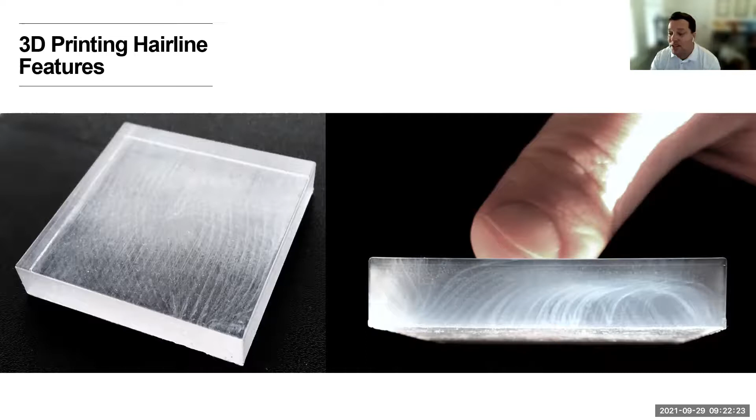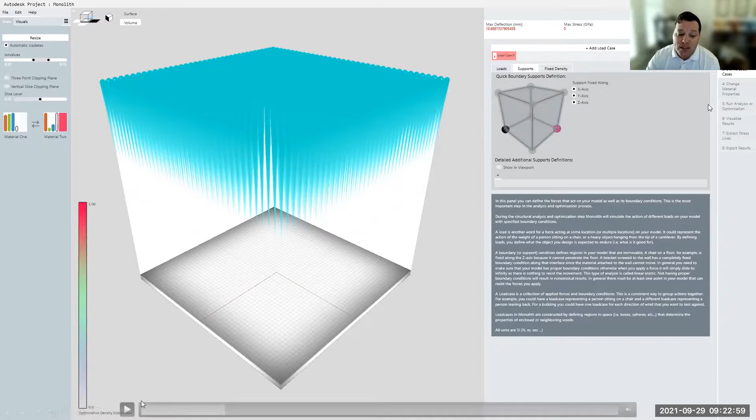Another thing that voxel modeling opens up is the ability to do certain simulations that would be difficult in any other way, which in this case is called topology optimization. Topology optimization, for those who aren't familiar, is a way to create a load case. In this case, you saw where I'm defining a load on the top and two supports. So you're defining how a load is going to work its way through a volume, and then you let the solver determine the optimal shape depending on that load condition.

So here you can see if we had to support a load on the top and only have it touch down on two parts on the floor, this would be the optimal shape that would be form found in this object. So we have the ability to create structurally optimized objects.

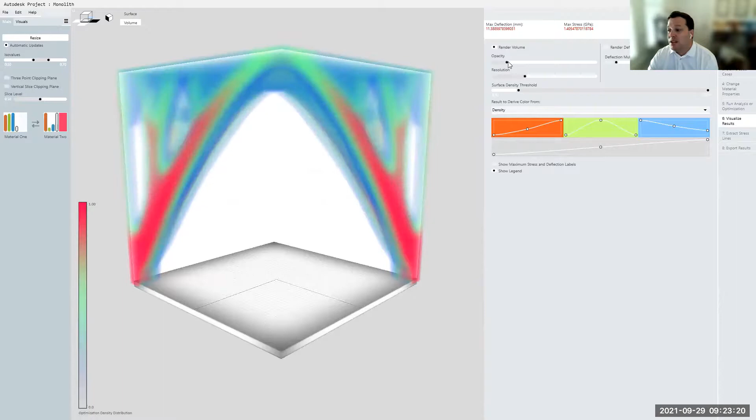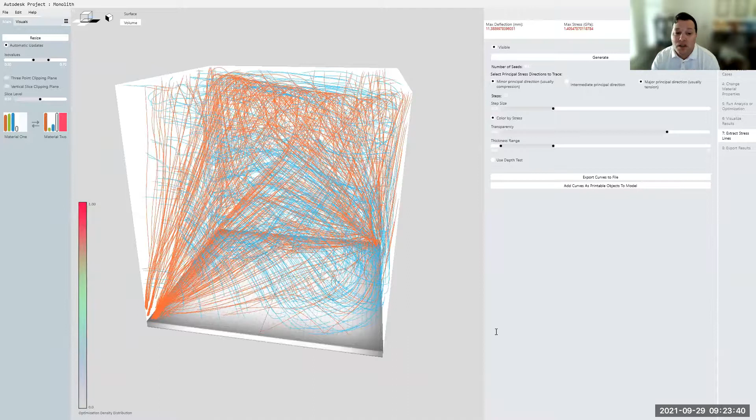And then of course we can also begin to extract principal stress curvature throughout the volume, and we can also export those curves as well. So we could begin to either 3D print those or export those as curves into that volume.

Or we can create and sort of confirm certain ideas. In this case, we have a distributed load on the top and two support conditions. If we think about how we might go about solving that from a statics perspective, for those of you taking structures, you'd say that's going to be an arch. You probably will define an arch to support a distributed load that comes down on two points. In this case, topology optimization confirms that.

So here you can see this is the optimal shape based on that condition, and we can 3D print using a clear, softer material and an opaque, harder material, and get these sort of bone-like structures that are denser where the material is needed and softer where they're not.